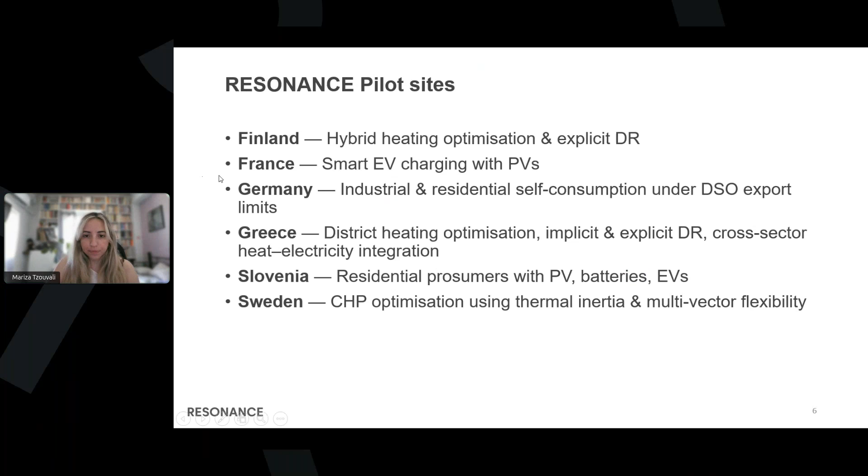The economic impact and the benefits of Resonance are multiple for multiple actors. So if we take a look at the building owners and the prosumers, for them, lower energy costs are unlocked through smarter consumption and smarter self-consumption, and the access to new flexibility programs. For the ESCOs and other software solution providers, there are new service offerings that are enabled by these CEM, RM catalogs and this service marketplace. Additionally, they can have reduced integration complexity thanks to these standardized interfaces.

Aggregators and retailers can have more accurate flexibility forecasts, automated bidding, and more reliable flexibility portfolios. District heating operators can optimize their heat production and act as flexibility providers. And on a system level impact, we could see higher RES integration, reduced peak loads, and generally a replicable and iterable model for Europe's energy transition.

And now I will move on to the Greek pilot case and talk a bit more about what we did in this pilot. Specifically, the main goals were to show how a district heating operator can become an active flexibility actor using Resonance tools to unlock new revenue streams, reduce operational costs, engage end users in flexibility, and test real DR events with households and public sector buildings.

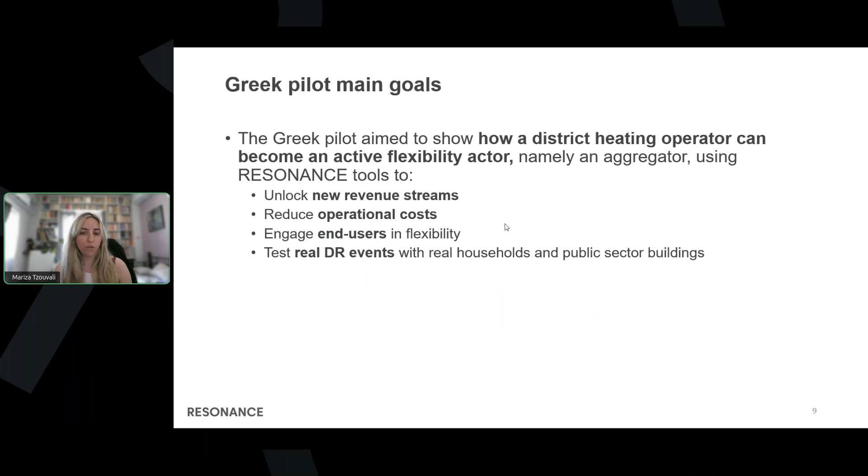The overview of the pilot: we had a cross-sector energy flexibility across district heating and electricity in Ptolemaida. It is unique because the district heating operator acts both as a heat producer and an aggregator. At the pilot site, we had 45 residential buildings and 3 municipal buildings participating. And from the district heating operator side, there were electric boilers and the TEP geothermal hot water used, while on the consumer side, we had district heating and heat pump flexibility.

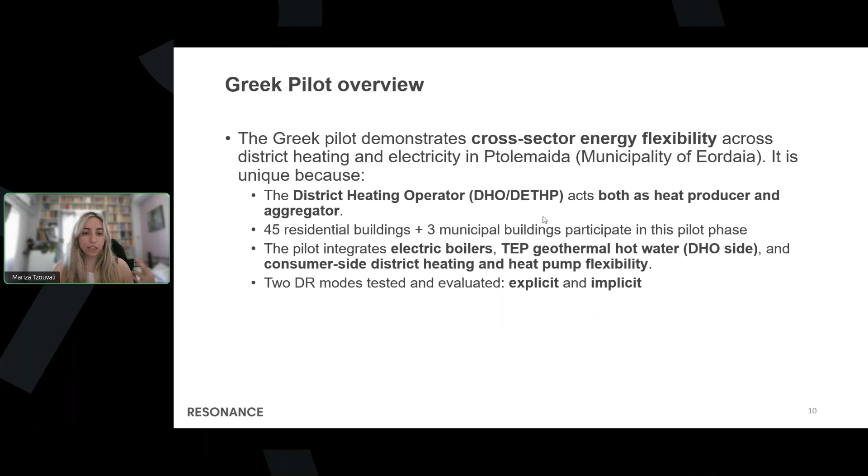We tested 2 DR modes, explicit and implicit. And we'll start our analysis with the explicit DR events. Generally, explicit DR involves direct payments or incentives for the participants to modify their energy consumption based on specific or direct signals from a producer or TSO.

Specifically in the Greek pilot, we had the DHO who uses electro boilers. So a load reduction directly reduces the electrical consumption of the DHO. The users would receive personalized thermostat adjustments and rewards points via the SEM app that was produced during Resonance. And all these actions were derived by the Resonance convex optimization module in the aggregation platform. Also, there were simulated bids for the flexibility market, but of course, this was only in simulation mode and not

in actual participation. The outcome of the pilot results was that we had an average flexibility of 60.5 kilowatt hours per event. We achieved the target in around half of the events that were tested. And from these pilot results, we computed a net margin profit for the aggregator at almost 30 euros. However, it's important to look at it at the larger scale and see how this model could work outside the pilot, but in real-world operations.

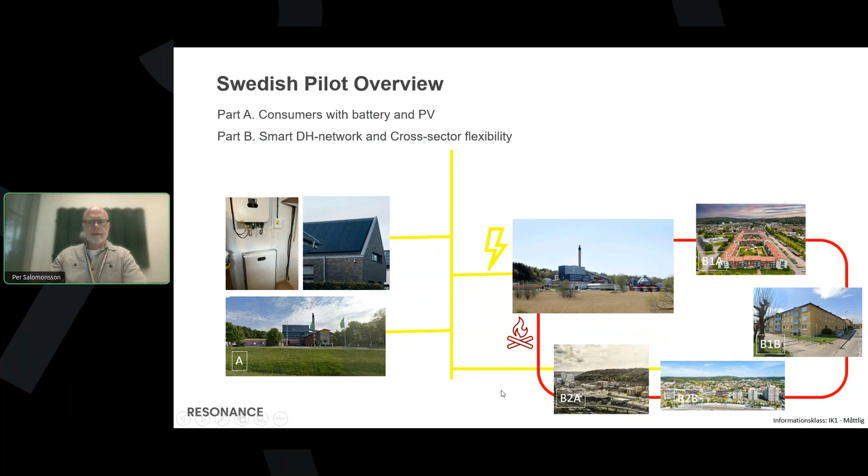To give an overview of the size, in pilot A with the batteries there's around 190 houses with batteries, and the district heating part B has again two subparts. One where we talk about heat inertia: there's 12 big buildings, 1,500 apartments. And the B2 part, where they can switch the heating between district heating and heat pumps, has around 0.6 megawatt electric and 2 megawatt heat. But first, Peter will start talking about pilot A with the houses with batteries. So over to you, Peter.

Thank you, Per. My name is Peter Rosengren, and I am the R&D director of CheckWatt. CheckWatt is an aggregator in Sweden that provides virtual power plant services. We have been responsible together with Mölndal for pilot A, where the focus has been on prosumers, and the flexibility they can provide is mainly from batteries, but also PVs, and in some cases EV chargers. These units are controlled by an existing energy management system installed at our customer sites, and we have extended that in the project with new intelligence and new resource managers, as Mariza explained. A resource manager is basically, in our case, an adaptation for a certain battery type.

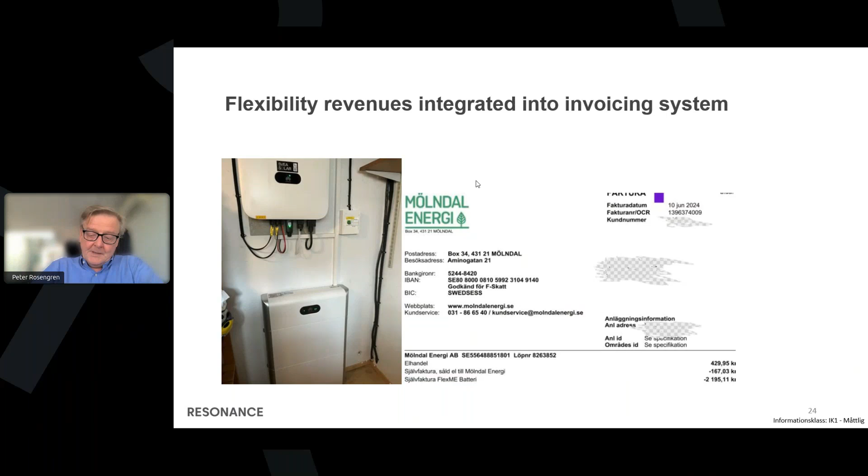Sorry, I moved too fast. So one of the results we have achieved is working with what is called the automated consumer flexibility manager of Resonance, in order to improve the optimization of the battery control. And this is optimizing on the spot price.

And we are keeping that within the limits of what is allowed from the FCR-D point of view. There are these services that the grid owner procures, and there are a lot of regulations around that. So the battery cannot go below 30% charge level or above 70% charge level. But this is what the optimizer does.

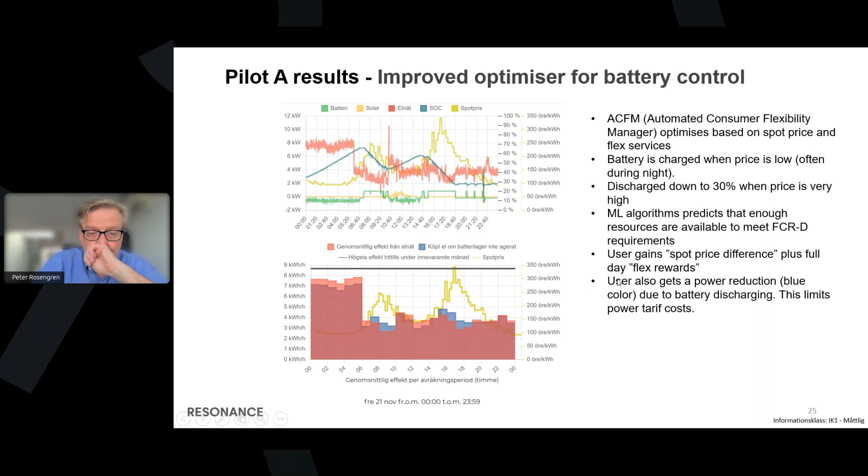And going to the second thing here, the multi-market: how one can utilize the flexibility resource on different markets. So the local capacity market, which is called Effekthandel Väst. Basically, one could say that there are two types of flexibility markets. One is procured by the grid owner, like FCR-D or FCR-N, etc. These are requested services in order to balance the grid based on unforeseen deviations. That's when these services trigger in, like an insurance.

The local flex markets are more local to a DSO like Mölndal. And the problem here is that people tend to do the same thing at the same time. Everyone is having a shower in the morning, which causes the hot water boiler to start, or everyone is cooking food in the evening, which causes the ovens to start, and that creates peaks in the electricity consumption, and that is handled by buying flexibility. The DSO can level that out, minimize their own cost, and also pay the user some money for that. And we were working on this market.

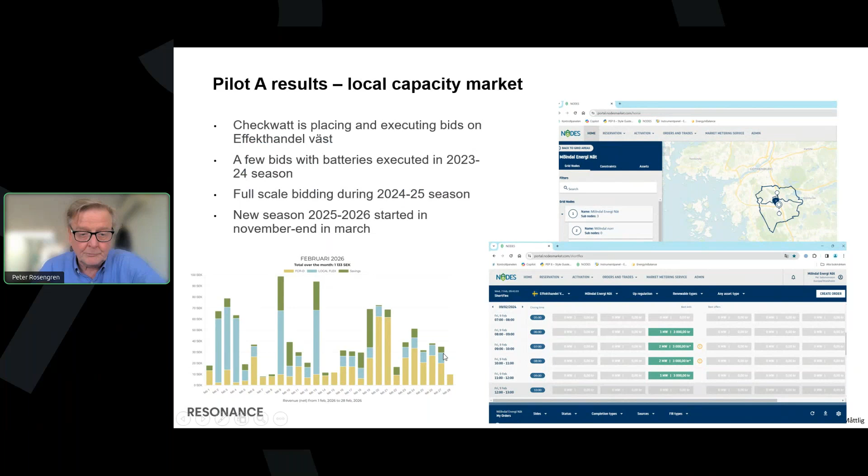And now there is an additional color in the diagram. We can see the blue ones. That is how much the user made in terms of local flex income. So the yellow one was income from the grid services, the green one from savings, and the blue ones from the local flex market. So it proved to be a very, very beneficial thing for the user.

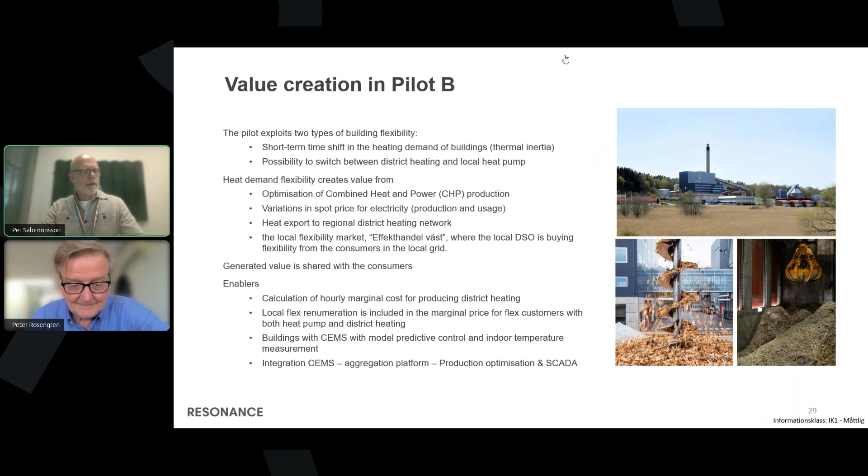Peter has told you about the batteries. We also had a part where we used district heating and combined heat and power production. And where does the value come from here? Well, first of all, there are two types of building flexibility. One gives us a possibility to shift the heating demand in the short term. And then we have the customers that have both district heating and local heat pumps, and vice versa.

Where does the value come from then that we are targeting? Well, one is, in a combined heat and power plant, it's important to actually match the heat and electricity demand with the markets. When you produce electricity, you also produce heat, and you want to actually optimize that.

Then the spot price in electricity varies over the day, and we want to sell as much when it's high prices for the production, and the users, of course, they want to shift to use more electricity when it's low price.

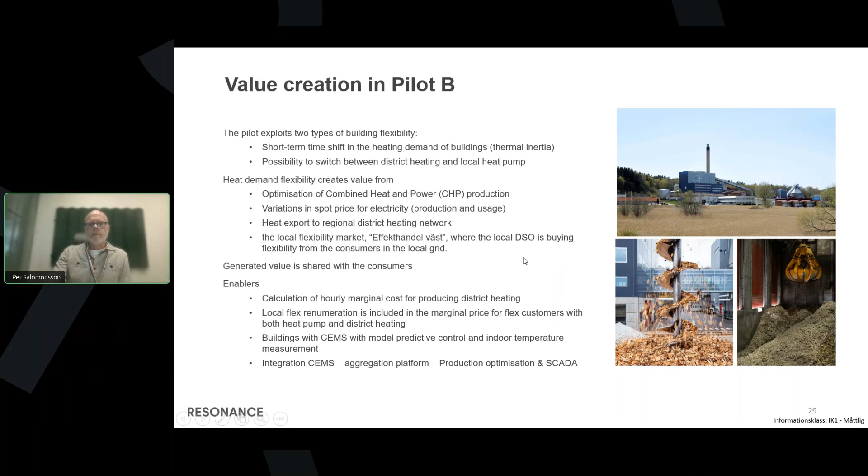Okay, so the beauty of this building flexibility as a service is that we create value for the whole energy system, which becomes more efficient. We can reduce peak loads and congestions, and we utilize the system better. The end customers get a lower cost, and the system is automated to a very high degree, so they don't have to make any active choices.

And for the energy company, we get an optimized production, and increased income from electricity and from heat. And we will also solve our power problem in this local flexibility market. And last but not least, we get a much better engagement with customers. One is that we share our value with them.

Another thing is that we can see if the building is working well or not, and we can tell them it seems that you have some problems with your heating system, and maybe you should try to fix that. So this is the system, with a lot of benefits for all the actors.

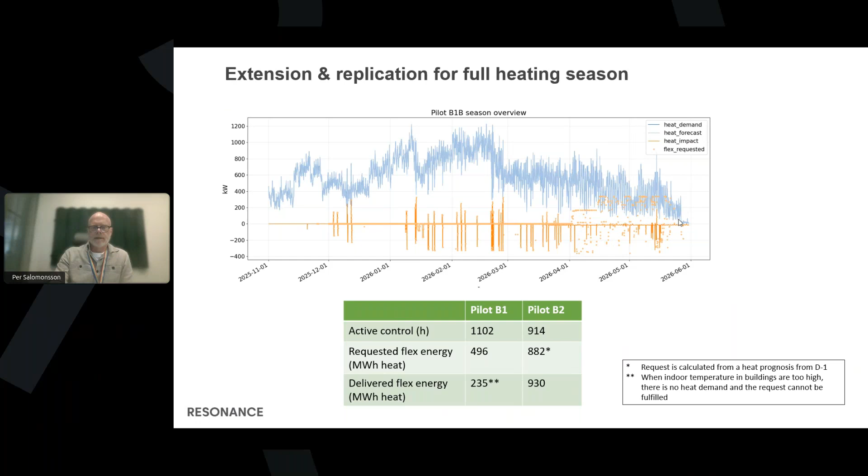We had active control during 1,100 hours. We requested around 500 megawatt-hours of heat, and we actually got half of that. This was a bit of a problem in the spring when the weather got warmer. The buildings were actually hotter than the control temperature, which means we had a problem controlling the flexibility as well as we had hoped.

But what we did here, we connected this flexibility to our production plant during the full season. The actual operation of the CHP plant was the reference case. For each day, we made a re-optimization that included the flexibility in this pilot. So we got a signal, sent that flex request to the buildings, and could see how they responded. And then we could also calculate how much value that flex would be.

So we were not actually running the CHP plant with flexibility, but we took the actual operational plan and see how much could we gain in that case with the flexibility. This was, we think, a very interesting

thing to do. However, in this way, we can only get some of the value streams included, because, for example, for the ancillary services, that requires that we would have to adjust our bidding strategy, and that was not done. So the value that we calculated in this case is a true value, but it's not the full value. And actually, most of the value was that we could increase the amount of electricity sold when we had high electricity prices.

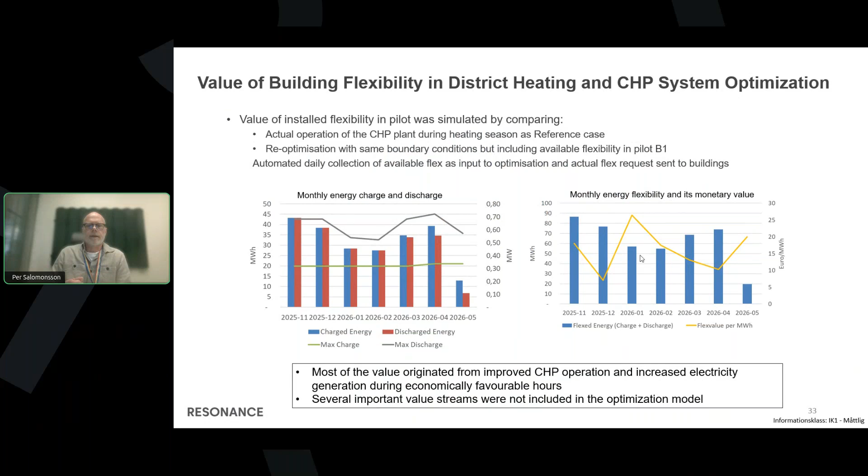So, for example, if you look at December here, you can see that we flexed quite a lot of energy, but the value for the flex was around 10 euros per megawatt hour, while in January there were fewer hours and less flexibility requested, but we reached a value of around 25 euros per megawatt hour for that flexibility. This shows to us that there's a lot of optimization to be done, and the value that we can get out of this can be higher than what we actually got.

But the thing is, this advanced building control is a requirement to make this work, and the CEM system generates customer energy savings. So they actually can pay a little bit for the installation and still get a really good business case, because they save energy because of this model predictive control.

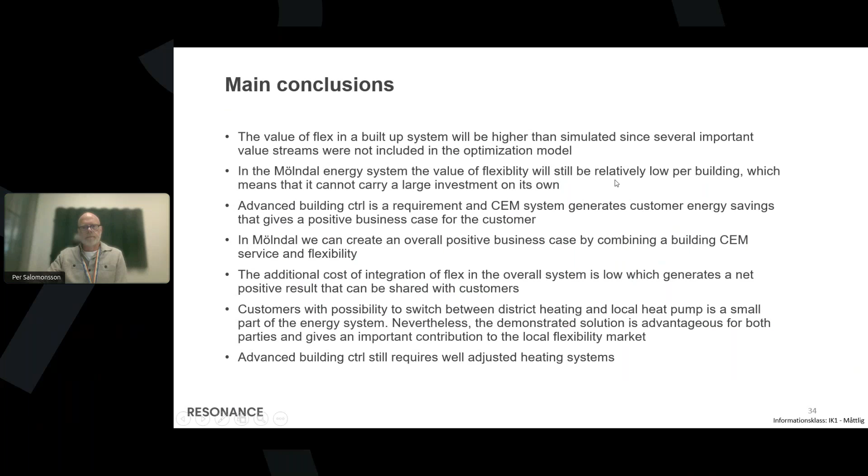But once you do that, you can get a really good case both for the customer and for the district heating company, and also produce some more electricity on the way. Okay, thank you. That concludes our presentation.